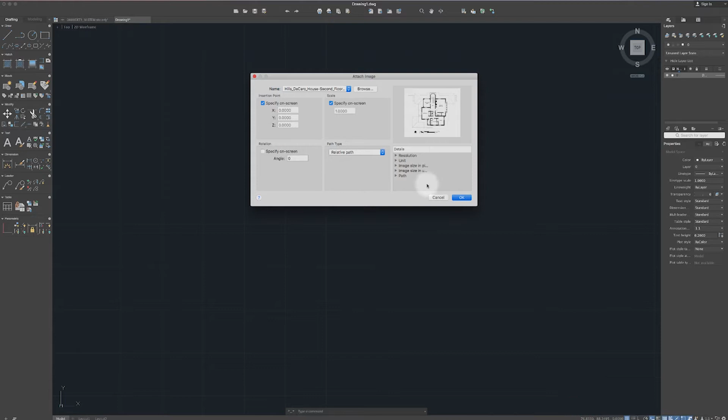So I'm going to attach a JPEG or an image here. You can also do PDFs, and I'm just going to open it in here. You're greeted with this dialog box which says specify on screen, specify on screen. I'm going to leave these as they are and just click OK. Now this is going to enable me to scale it up randomly however I choose to, and I'm just going to click randomly.

Next tip I'm going to do is select that JPEG or PDF, and I'm going to up the fade just so that I can work on it a little bit easier.

Now this image that I have grabbed from Wikicommons is being really nice because we have a bar scale down here that I can use for my scaling feature. However, if you do not have something like that, perhaps you've got a big AutoCAD document or anything else that doesn't have a bar scale or any dimensions, you can use a point of reference. So you can use doors that are about 1 meter in length, or benches which could traditionally be about 600 mils, or whatever you like.

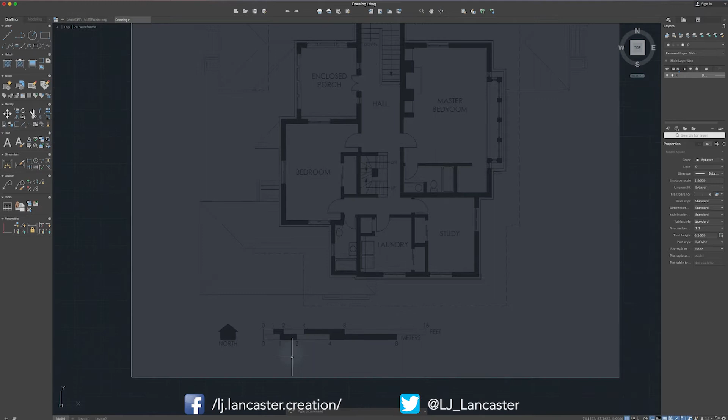So for me, I'm going to use this measurement down in here. However, I'm going to show you how to use something different as soon as I've shown you the basics. So down in here, I'm going to create a line by hitting L, and I'm going to specify down in here on this point and over in here, and I know that there is going to be 8 meters.

I'm going to hit F8 on this to snap it to orthogonal view, and I'm going to type in 8,000 because I know that's 8 meters in millimeters. I'm going to then hit top view, and you can see now that JPEG is down in here, but it should be way out here.

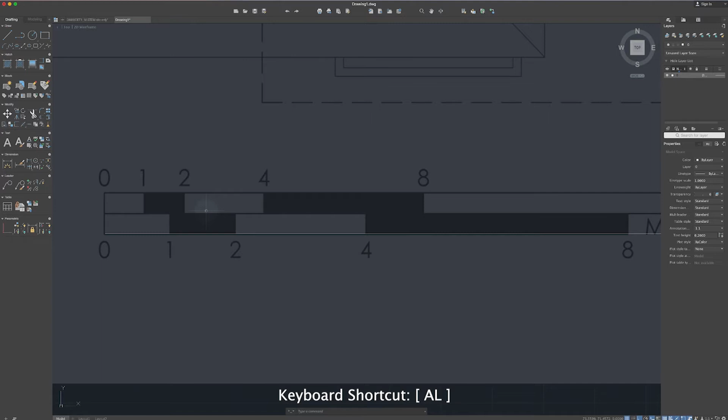So our next tip is to grab our align tool. I'm going to quickly grab another line, and I'm going to grab there and then come along to the 8 meter mark and then click instead. So now we've got two lines. We've got one that's supposedly supposed to be 8 meters, and the actual one that is 8 meters.

And next tip is to use the align tool, which is AL on your keyboard shortcuts, and we're going to select the object. So obviously it is this JPEG or PDF, and I'm going to hit enter. Next it's going to ask us to select 3 different points. AutoCAD is a 3D based program, however normally I only use it for 2D, so I'm going to ignore the third point.

So the first point I'm going to ask to go from here, and then it's going to ask specify destination point. That's going to be in the same location because of how I've drawn these lines. So I'm going to click again. Now it's going to ask a second point.

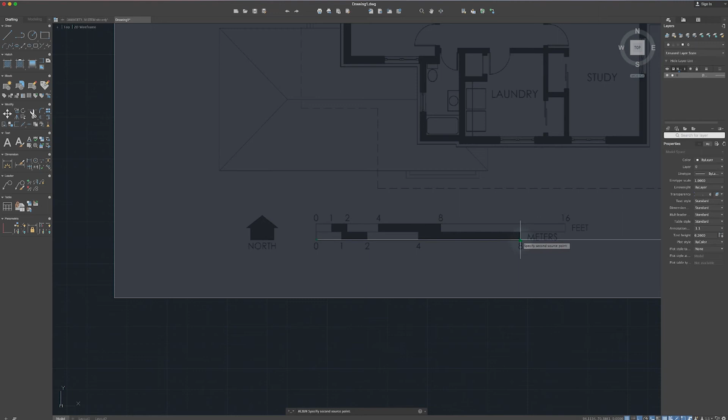I'm going to come along and find the end of where that bar scale ends, click on that, and then it's going to ask a destination point, and that was back out in here. So I'm going to click on that, and then it's going to ask for a third one. I don't care about that, so I'm just going to hit enter.

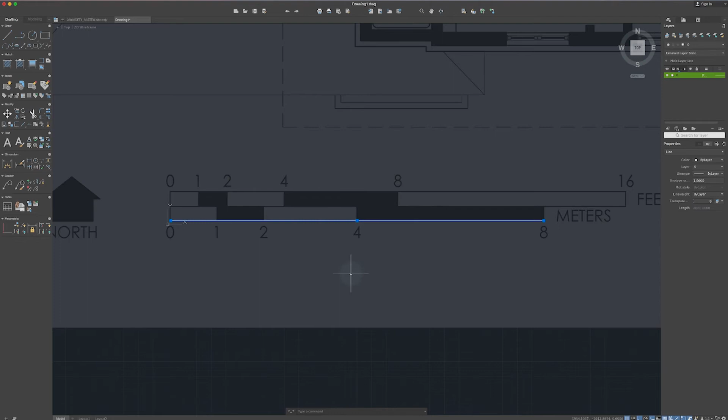It's going to ask, do you want to scale the objects based on the alignment? And I'm just going to hit yes. And there we are, guys, nice and easy. It has now been scaled up to 8 meters. So if I hit DI for distance, I can come in down through here, and I can scale that bar scale out, and you can see that we are now sitting at the 8 meters that we initially wanted.

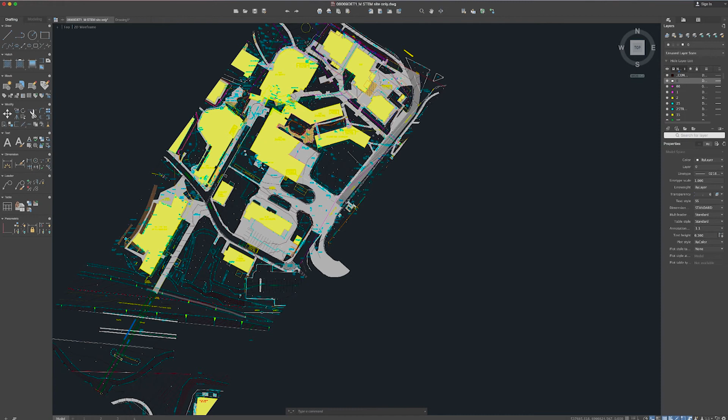Now say you do not have a bar scale like that, and perhaps you've got a messy JPEG image or DWG image kind of like this, and you don't know what scale it is. So I can now see down in here that I've got a few car parks, and if I come down in here and do a distance command, I can select between 2 points, and you can see that should be about 2.4 meters and not 1.6 millimeters.

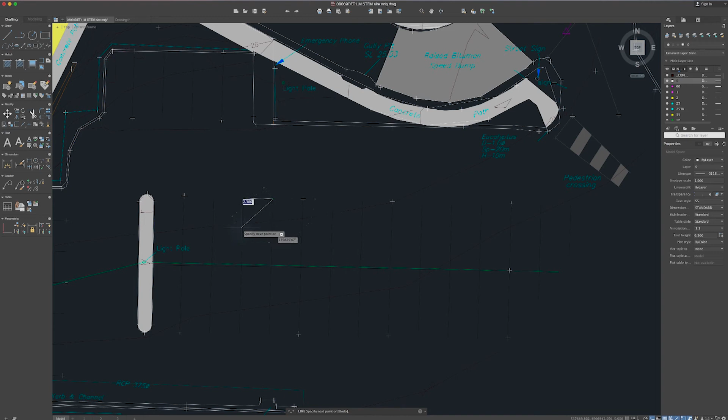So what I can do then, guys, is grab that line, and I'm going to keep it on the same trajectory. So I'm going to grab that, and then move it over into a different space, maybe over in here. This is going to allow me to keep the same axis as what we were using. So I'm going to hit L again, select along here, and then type in 2400 millimeters, which is then going to spit out that there.

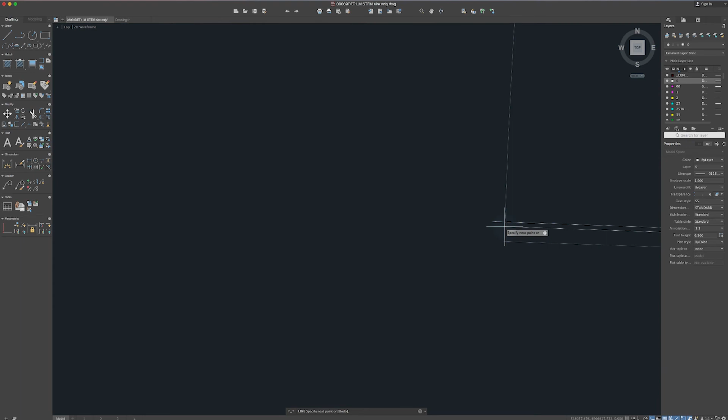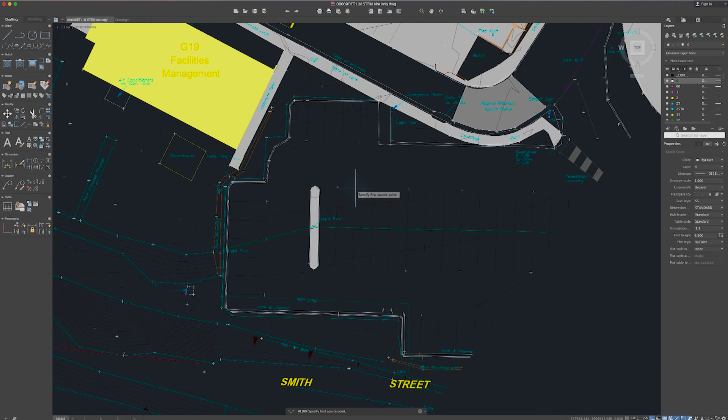And I'm going to delete that first line because I don't really care about it too much. And you see car park space should be about that length there, or that width there. And now I can come back into this, go into align command again, AL, select object. So obviously we want all of the DWG, hit enter, and now we can select that first point of the car park space, match it up to the first point of the line, come back down, select the second point, and then hit the other end point of the line.

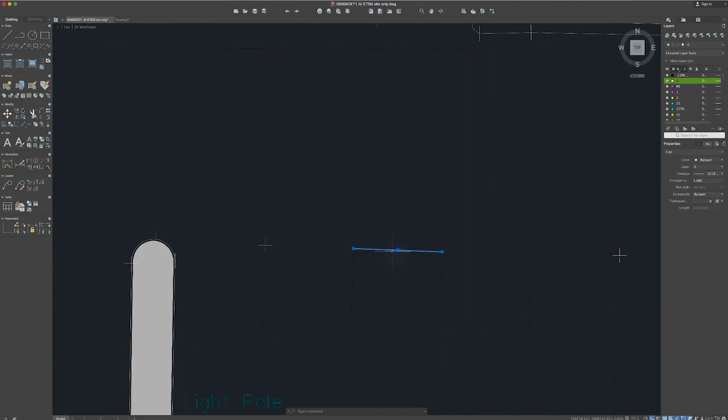Again, it's going to ask for a third point. We don't care about this. Hit enter, and scale object, hit Y for yes. And now it's going to scale that up as we need it. If we zoom back out, you can see it's now come into the scale that we want.

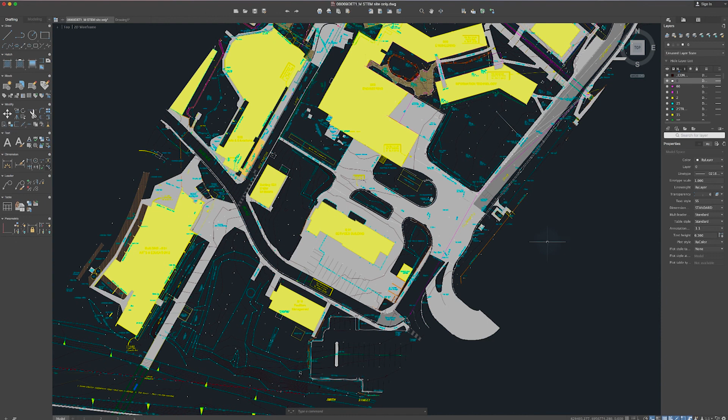If we come back in and use our DI command, we can double check that, and now we know that a car park width is about 2400 mils, and based off that we know that each of these buildings is roughly correct. Obviously, if you're doing something a little bit more precise, this isn't going to work and you're going to want your DWGs exact. However, for something like just doing up a quick visualization of the walls or something, it's going to work pretty accurately.